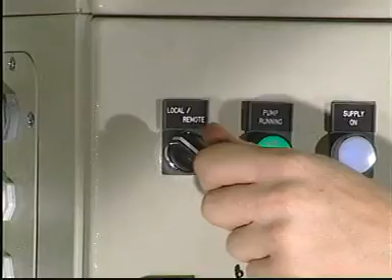Check that the pressure drop indicator for the pressure filter is green. Also check that the hands on the pressure drop gauges for both suction filters are in the green area. Check that the oil pressure is between 40 and 50 bar.

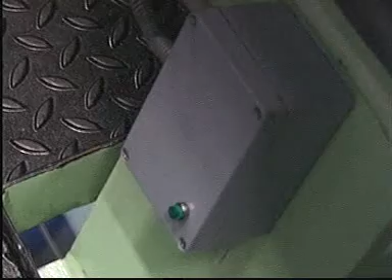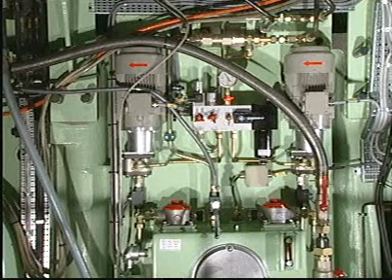Press the pre-lubrication button on the operating panel and check each of the feedback indicators to confirm that all lubricators are functioning properly. Set both pumps to remote control. The lubricating system is now ready for operation.

When the auxiliary blowers are started up, the lubricating system will automatically start and carry out the pre-lubrication process. If the engine is not started up within a certain period of time, the lubricating system will return to the standby mode and then start automatically when the engine is started.

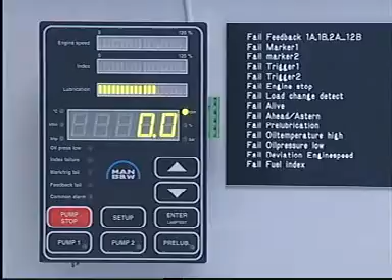Check that one of the pumps starts automatically when the engine starts and that no alarms have been activated. Check that the pressure builds up to 40 to 50 bar and check each of the feedback indicators to confirm that all lubricators are functioning properly.

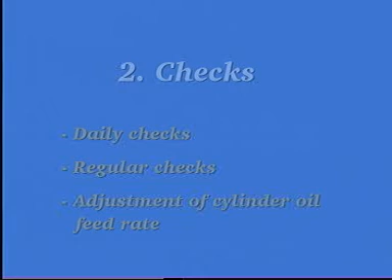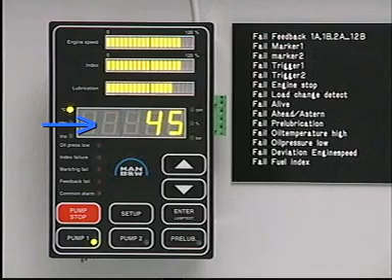Check that the oil temperature is between 40 and 60 degrees centigrade. Check that there are no leakages in the system. Check that the pressure is between 40 and 50 bar. Check each of the feedback indicators to confirm that all lubricators are functioning properly.

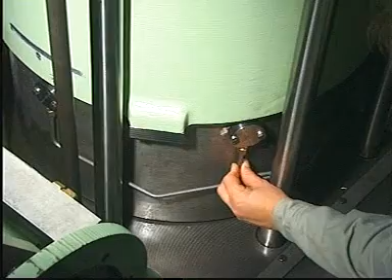Feel the lubricating pipe for pressure surges, the presence of which indicate that the lubricating points are being supplied with oil. Make regular checks, for instance in connection with the scavenge port inspections, that each lubricating point is functioning correctly.

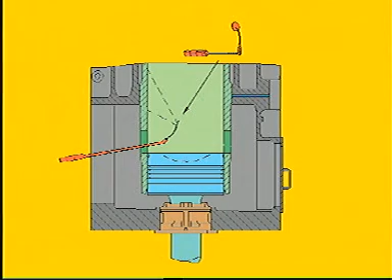Start the lubricating system and press the pre-lubrication button to inject oil into the engine cylinders. Use a mirror inserted through the scavenge port to check all lubricating points. Regularly measure the cylinder oil consumption via the cylinder oil tank and use these measurements to calculate the cylinder oil feed rate.

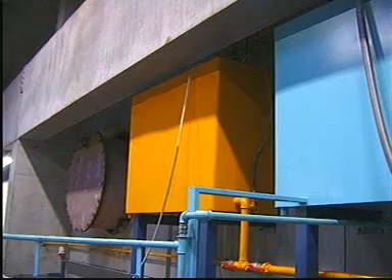Once a good cylinder condition has been obtained, with well-running cylinder liners and piston rings, the good condition can in most cases be sustained by employing the basic setting to ensure the correct cylinder oil feed rate. The basic setting corresponds to the reading 100% on the operating panel.

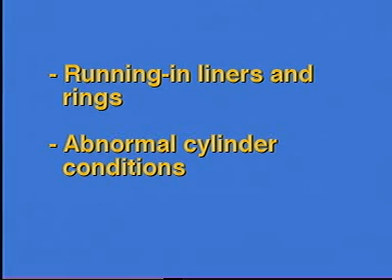When running in cylinder liners or piston rings, or in the event that abnormal cylinder conditions are detected during one of the regular scavenge port inspections, the feed rate of the relevant cylinders may have to be adjusted. See Instruction Book, Volume 1, Operation, Chapter 707. The feed rate of an individual cylinder can be adjusted via the operating panel.

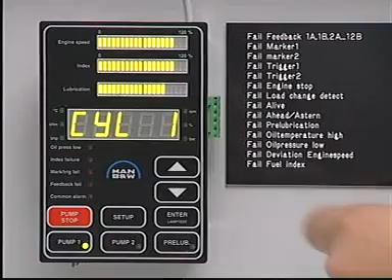Press Setup and Enter simultaneously to enter the setup mode. Press Setup to display the current feed rate setting. Press the up or down buttons to change the feed rate to the desired value. Press Enter to save the new value. Press Setup and then the up or down buttons to repeat this sequence for another cylinder, or press Enter to exit the setup mode.

Before starting any disassembling work, stop the engine. Shut off the starting air distributor. Block the main starting valve. Engage the turning gear. Open the indicator cocks and switch off the electrical power supply to the pump station.

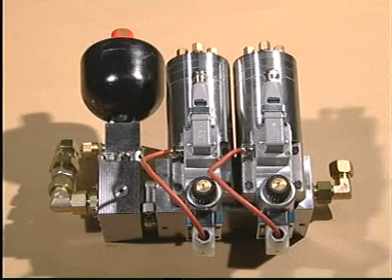Note, it is not necessary to stop the engine and pump station if the lubricator unit is fitted with 2 lubricators for each cylinder. See Instruction Book, Volume 2, Procedure 903. In the event that a lubricator malfunction activates the engine slowdown function, the lubricator can be replaced without stopping the engine, provided that lubrication is re-established within a maximum of 15 minutes.

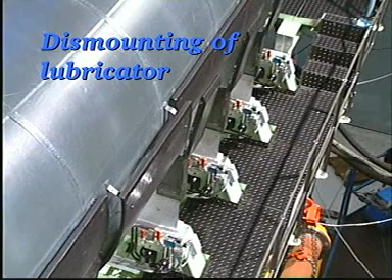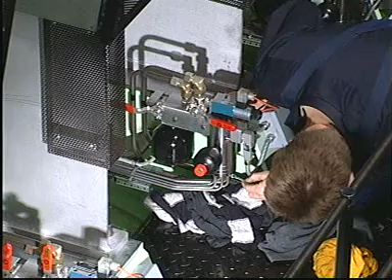Close the supply valve and then open the equalizing valve by turning both handles to a horizontal position. Loosen and remove the screws from the cover with lubricating pipes. Remove the screws that secure the lubricator to the hydraulic block. Disconnect the electrical plug and remove the lubricator.

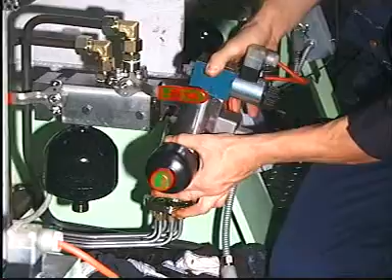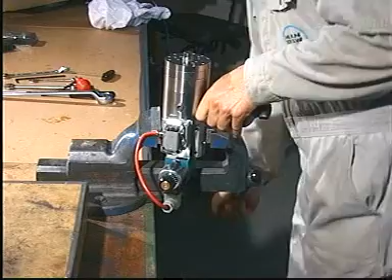Secure the lubricator in a bench vise with soft jaws. Unscrew the oil accumulator and the adjusting screw, and remove the bushing. Discard the O-ring from the adjusting screw.

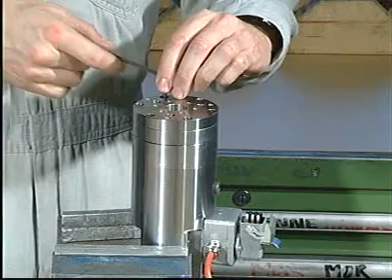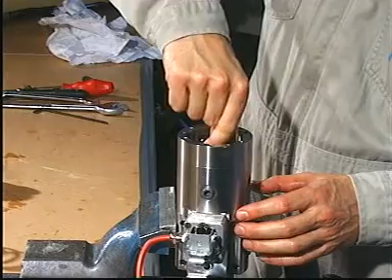Remove the screws that secure the cylinder block to the housing and remove the cylinder block. Discard the O-ring from the cylinder block. Remove the spring and the actuator piston and remove the plungers.

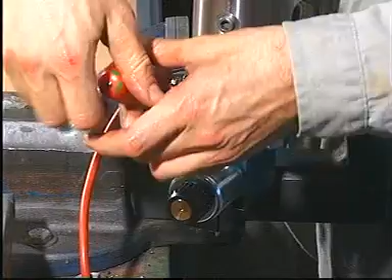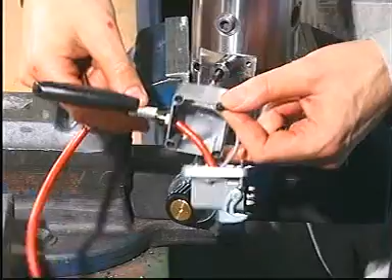Loosen and remove the connector on the solenoid valve and remove the terminal box. Carefully unscrew the feedback sensor. If the feedback sensor is to be replaced, disassemble the connector and disconnect the feedback sensor.

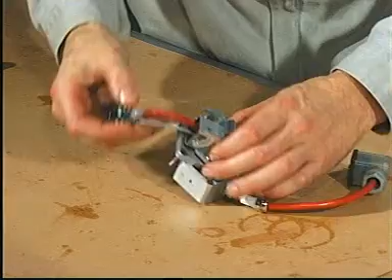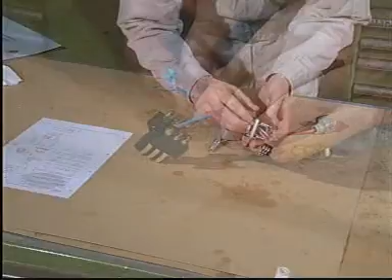Mount the new feedback sensor after fitting it with a new O-ring. Connect the wires as shown in the instruction book and then reassemble the connector.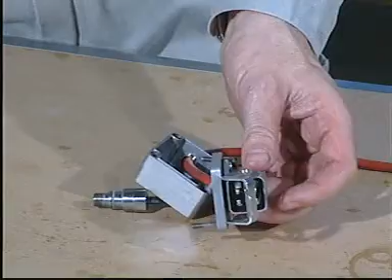Place the cylinder block in a bench vise with soft jaws and remove the non-return valve cover. Remove the springs and the steel balls. Remove and discard the O-rings. Carefully clean all the parts and dry them with clean, non-fluffy rags.

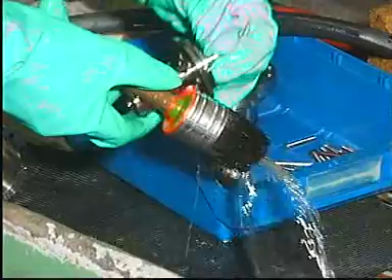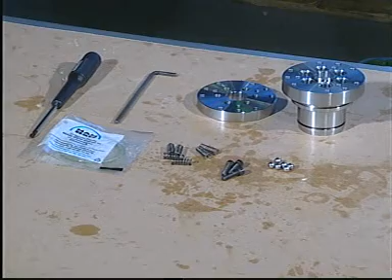Inspect all seats and sealing surfaces with a magnifying glass. Use a lamp to inspect the internal surfaces. Using new O-rings, reassemble the cylinder block. Insert the screws so that they just engage in their threads.

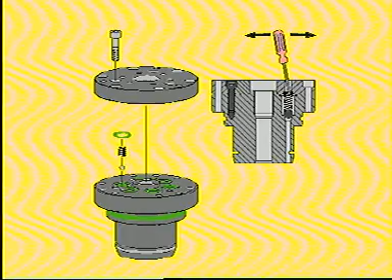Check with the tip of a small screwdriver that the springs of the non-return valves are correctly centered. Fully tighten the screws. Mount the plungers in the actuator piston and lubricate the plungers and cylinder block with cylinder oil.

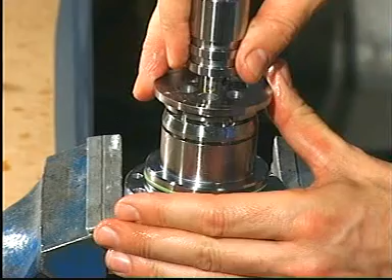Insert and align the plungers in the cylinder block. Remove the actuator piston assembly, mount the spring and reinsert the assembly. Check that the plungers can move freely. Press the actuator piston downwards and insert the screw to keep the parts together.

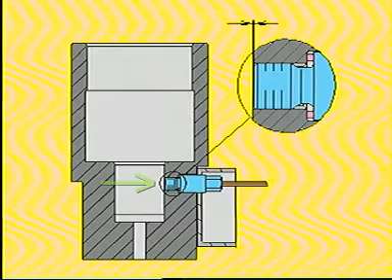Place the lubricator housing in a soft-jawed vise and mount the feedback sensor provided with a new O-ring. Check that the end of the sensor does not protrude into the cylinder for the actuator piston. Use fingers and something with a firm, straight edge, for example a caliper, to carry out this check. Mount the terminal box and the solenoid valve connector.

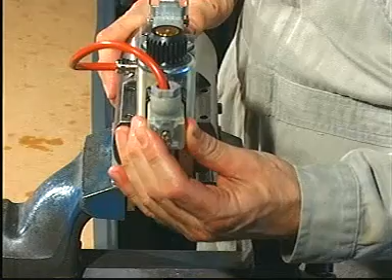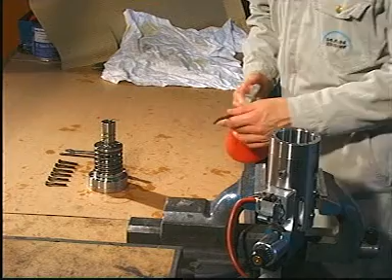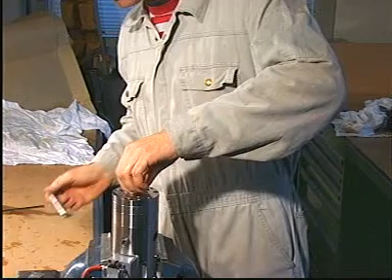Lubricate the housing and mount the cylinder block assembly. Remove the screw from the cylinder block assembly. Mount a new O-ring on the adjusting screw and mount the bushing and adjusting screw.

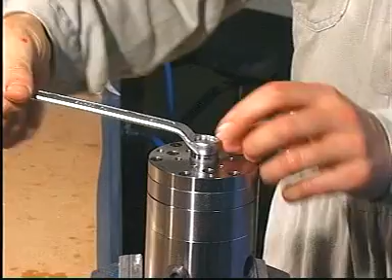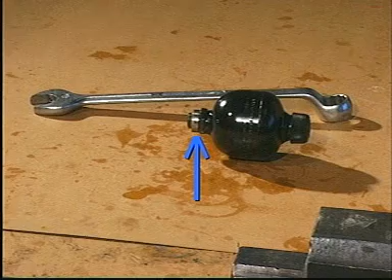Check the condition of the gasket before mounting the accumulator. Finally, mount the oil accumulator. If the lubricator is not to be installed immediately, use plastic plugs to protect each opening and coat all surfaces with a thin layer of oil.

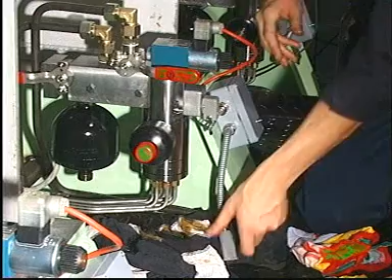Mount new O-rings on the hydraulic block and on the cover with lubricating pipes. Carefully mount the lubricator and secure it to the hydraulic block with the 4 screws. Connect the electrical plug and mount the screws which secure the cover with lubricating pipes to the lubricator.

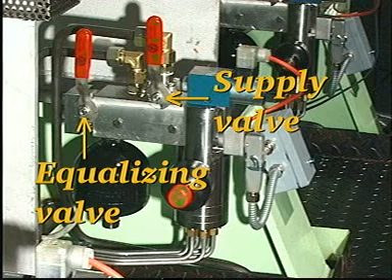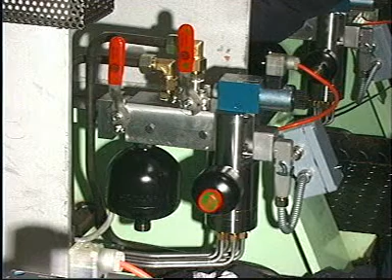Finally, close the equalizing valve and then open the supply valve by returning both handles to the vertical position. The smaller outlet accumulator must be dismounted before the pressure test is carried out. If there is room, the larger inlet accumulator can be tested while mounted.

Note: it is not necessary to stop the engine and pump station to check the inlet accumulator if the accumulator is equipped with a cut-off valve and a Minimess drain connection. See Instruction Book Volume 2, Procedure 903.

Close the supply valve and then open the equalizing valve by turning both handles to a horizontal position. Loosen the oil accumulators and unscrew them slowly to release any remaining oil pressure.

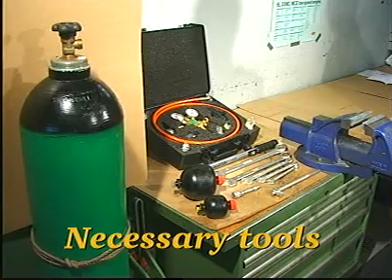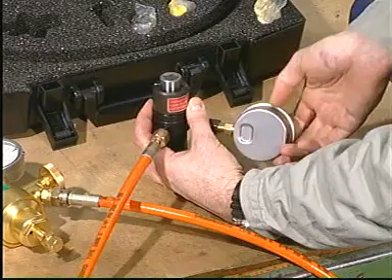Connect the hose to the reducing valve and to the filling valve. Insert a copper gasket and mount the 0 to 60 bar pressure gauge. Connect the reducing valve to the nitrogen cylinder and tighten all connections.

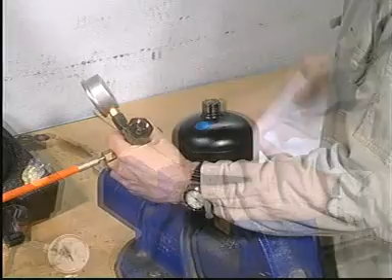Secure the inlet accumulator in a bench vise with soft jaws and remove the plastic plug. Carefully clean the sealing surfaces of the accumulator and the filling valve and mount the filling valve.

Make sure that both the venting valve and the outlet valve are closed, and then open the plug screw in the accumulator with a 1/2-inch square socket wrench. Read the nitrogen pressure and compare it to the value stated in Procedure 903. If the pressure is too high, reduce the pressure by opening the venting valve.

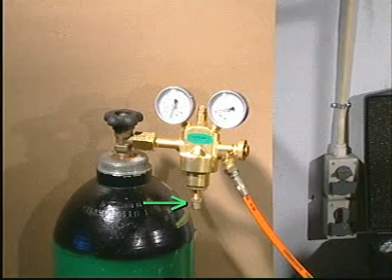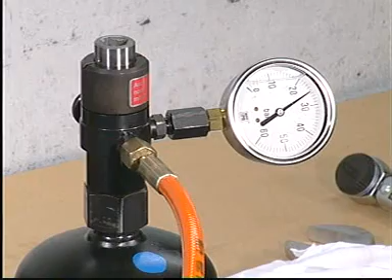If the pressure is too low, make sure that the reducing valve spindle is turned fully counterclockwise and then open the valve on the nitrogen cylinder. Turn the spindle slowly in the clockwise direction until the outlet pressure is slightly above the specified pressure. Open the outlet valve, fill the accumulator to the specified pressure, and then close the outlet valve.

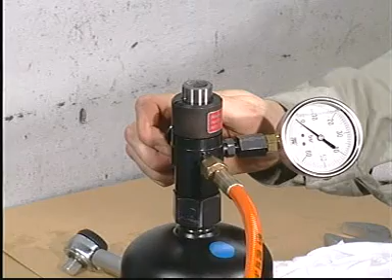Adjust the torque spanner to the value stated in Procedure 903 and tighten the plug screw. Open the venting valve, close the valve on the nitrogen cylinder, then open the outlet valve and turn the spindle fully counterclockwise. Remove the filling valve and once again tighten the plug screw to the specified torque. Finally, mount the plastic plug.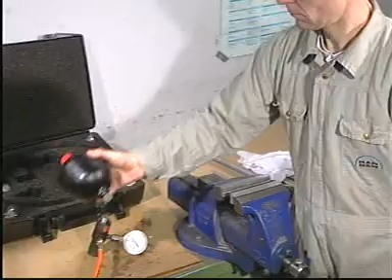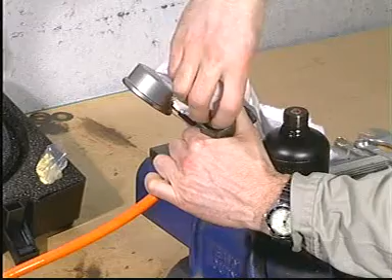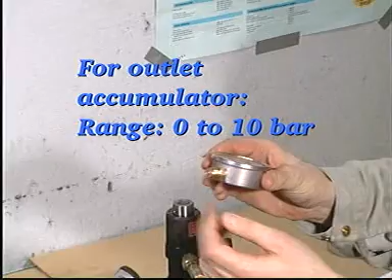Secure the outlet accumulator in a soft-jawed vise and remove the plastic plug. Carefully clean the sealing surfaces of the accumulator and the filling valve and mount the filling valve. Remove the 0 to 60 bar pressure gauge. Fit a copper gasket and mount the 0 to 10 bar pressure gauge. Repeat the pressure testing procedure. Refer to Procedure 903 for the specified nitrogen pressure.

Check the condition of the gaskets before mounting the accumulators. Mount the accumulators. Finally, close the equalizing valve and then open the supply valve by returning both handles to the vertical position.

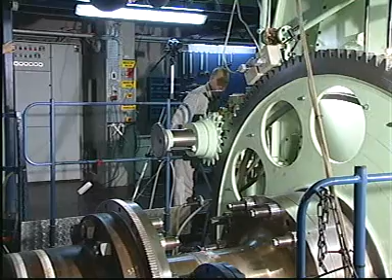The position of the crankshaft has no relevance with regard to the checking and replacing of the trigger pickups. However, before checking and replacing marker pickups, the crank throw for cylinder number 1 must be turned to the top dead center position. Check the top dead center position at the turning wheel and confirm it by means of a pin gauge measurement in the crankcase.

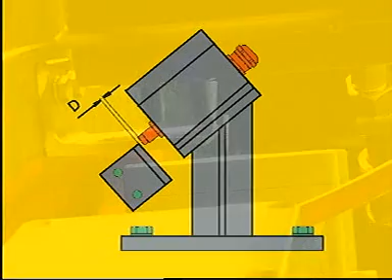Check that the uppermost edge of the marker plate is in the center line of the marker pickups. Check the distance between the pickups and their counterparts with a feeler gauge. See Instruction Book Volume 2, Procedure 905. Adjust if necessary. Remove the junction box cover.

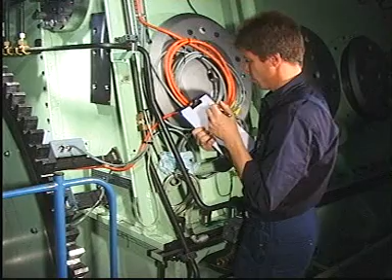Before replacing the pickups, make a sketch of the wiring connections, indicating which wire is connected to which positions, so that the safe remounting of the pickups can be ensured. Loosen the nuts, lock nuts and wires, and replace the pickups.

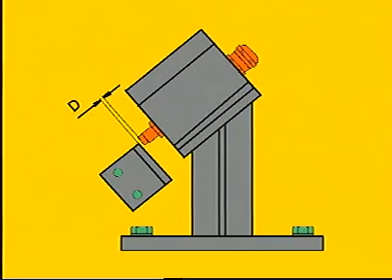After installing the new pickups, check that the uppermost edge of the marker plate is in the center line of the pickups, and check that the gaps to their counterparts correspond to the values given in the instruction books. Finally, reinstall the junction box cover.

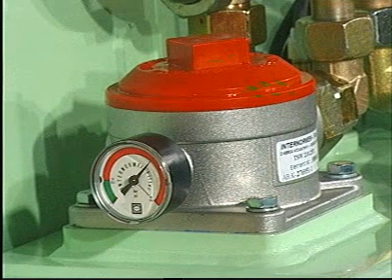If the hand of the pressure drop gauge points to the red area, the suction filter must be overhauled. This can be carried out while the pump station is running. Stop the pertaining supply pump and switch off the electrical power supply. Close the valve in the suction line and dismount the suction filter cover. The suction filter housing has a built-in cut-off valve which automatically stops the oil flow to the housing during disassembly. Remove the filter insert and fit a new one.

Mount the cover. Open the valve in the suction line. Finally, switch on the electrical power supply and set the pump to remote control. Check that there are no leakages.

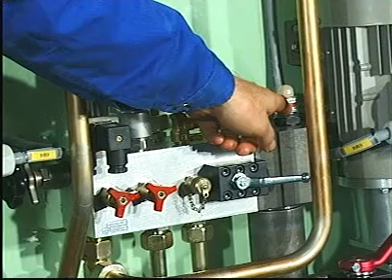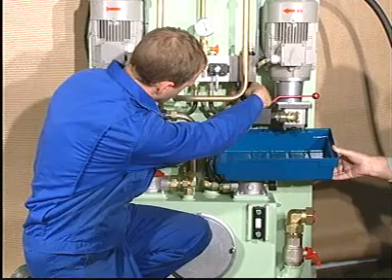If the pressure drop indicator is red, the pressure filter must be overhauled. This can be carried out while the pump station is running. Turn the handle of the valve so that the oil bypasses the filter. Dismount the filter housing and replace the filter insert with a new one. Mount a new sealing ring on the filter housing and mount the housing.

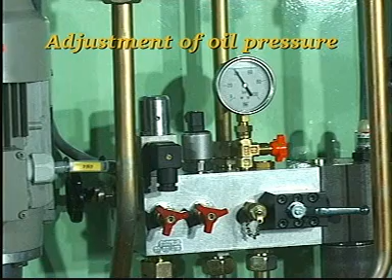Reset the pressure drop indicator, if this has not already been done automatically, and turn the handle of the valve so that the oil passes through the filter. Check that there are no leakages. Read the oil pressure on the pressure gauge and compare the reading with the value given in the instruction manual. If necessary, adjust the pressure by turning the handle on the side of the hydraulic block.

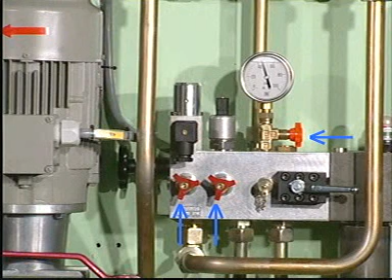The hydraulic block is fitted with a number of cut-off valves, which allow the pertaining components to be replaced while the pump station is running.